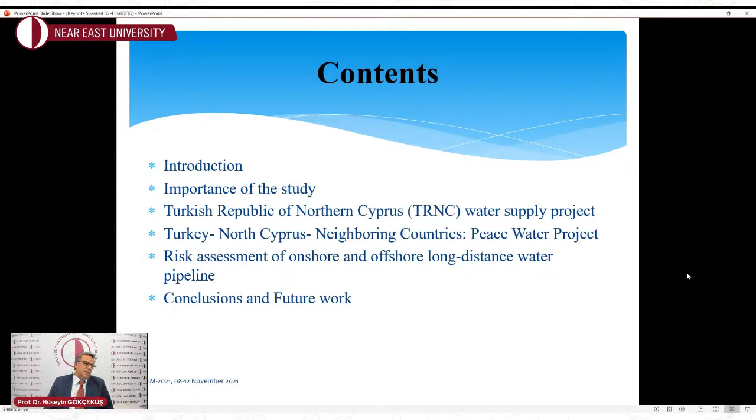My presentation includes introduction, importance of the study, Turkish Republic of Northern Cyprus water supply project, Turkey-TRNC neighboring countries peace water project, risk assessment of onshore and offshore long-distance water pipeline, and at the end of my presentation you will see conclusions and future work.

Rapid population growth has increased energy demand, economic activities, and water crisis over the last few decades, which leads to reduced resources on land and increased environmental issues. Therefore, certain human activities have moved from land to sea to explore marine resources to support economic development and solve the global water crisis. For example, the Turkish Republic of Northern Cyprus water supply project, nearshore wind farm installations, and so on.

Maritime engineering is necessary for the success of offshore development projects. However, because of the highly uncertain ocean working environment, the probability of maritime engineering project failure is high. Using risk assessment to improve maritime engineering technology is a reasonable approach to managing this problem.

Risk is generally understood as the possibility of human casualties or property damage caused by an event. Therefore, the risk of an event includes the number of casualties or extent of damage and the frequency of occurrence. According to the risk management guidelines of the International Organization for Standardization, risk assessment integrates three processes: risk identification, risk analysis, and risk evaluation.

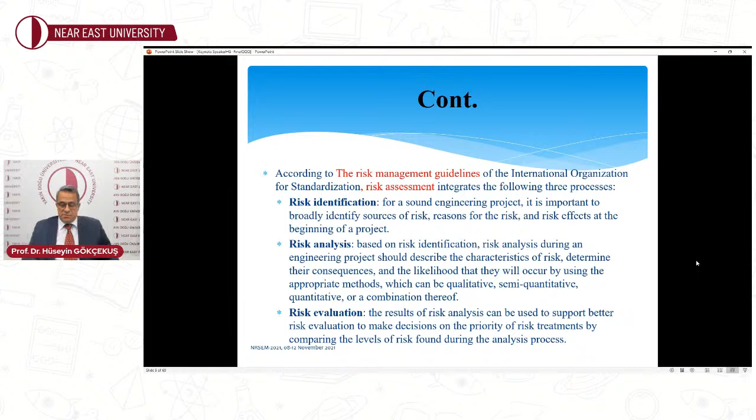Importance of this study: engineering project managers have recently adopted risk control techniques to improve project success rates. A successful engineering project depends on strong engineering technology and on knowing how to deal with the risk caused by uncertain factors throughout a project.

Risk management can provide assistance to engineering projects in three areas: identifying factors that influence project success, focusing on the most hazardous factors based on risk priority levels, and balancing the cost and benefits of risk treatments.

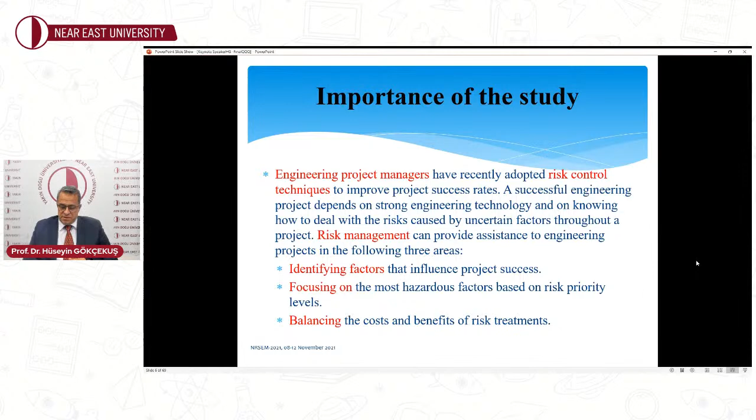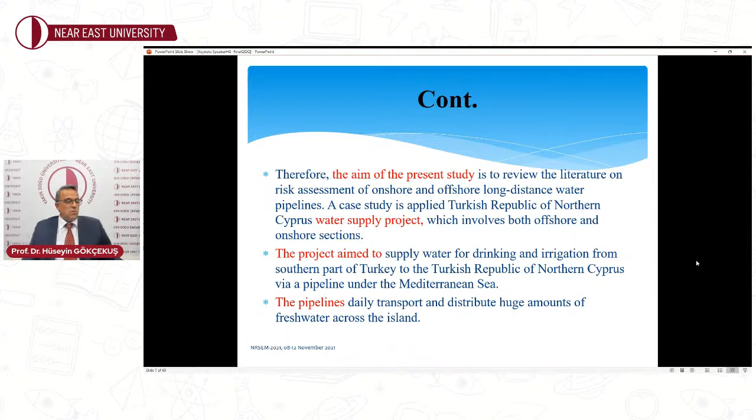Therefore, the aim of the present study is to review the literature on risk assessment of onshore and offshore long-distance water pipelines. A case study is applied: the Turkish Republic of Northern Cyprus water supply project, which involves both offshore and onshore sections. The project aimed to supply water for drinking and irrigation from the southern part of Turkey to the Turkish Republic of Northern Cyprus via a pipeline under the Mediterranean Sea. The pipeline daily transports and distributes a huge amount of fresh water across the island.

Turkish Republic of Northern Cyprus water supply project. Let's talk about this project. It's known, but let's make it more clear.

TRNC experiences problems such as freshwater shortages, irregular rain distribution, and rain pouring down directly into the Mediterranean Sea without infiltration. Due to climate change and high temperatures, evaporation is increasing in water storage structures. Because of the water shortage problem, groundwater is overexploited, causing the water table to decline below sea level by many meters. This has made the island's water salty, and so the water quality of TRNC decreases year by year. Generally, most of the island's water needs rely on groundwater.

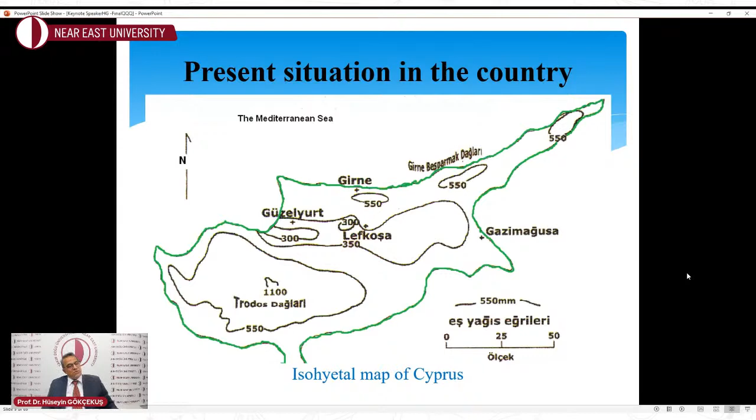This figure presents the isohyetal map of Cyprus, showing the present situation in the country. This is the whole island - Turkish Cypriots living in the north and Greek Cypriots living in the south. If you check this figure, you can see the lowest rainfall values between Girne Beşparmak Dağları mountains and Troodos mountains, in the Mesaoria plain. Around the Güzelyurt region, it's less than 300 millimeters per year.

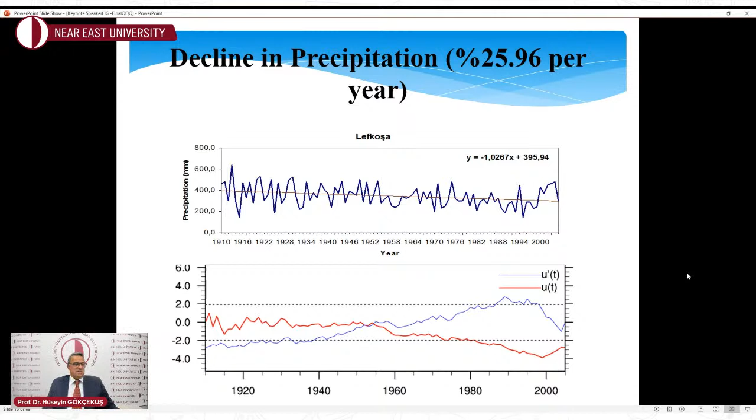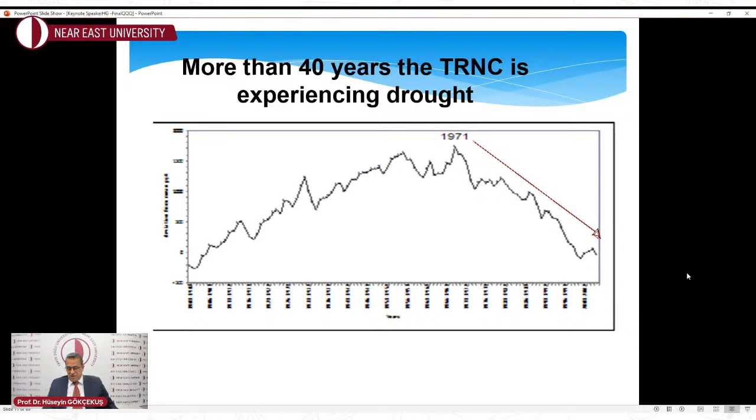This graph is also calculated and drawn by us. The decline in precipitation is very clear - over approximately 100 years, the precipitation value decreased by 25.96%. It's very important. This figure shows that for more than 40, 50 years, the TRNC has been experiencing drought. Since the 1970s, the yearly rainfall has continuously decreased.

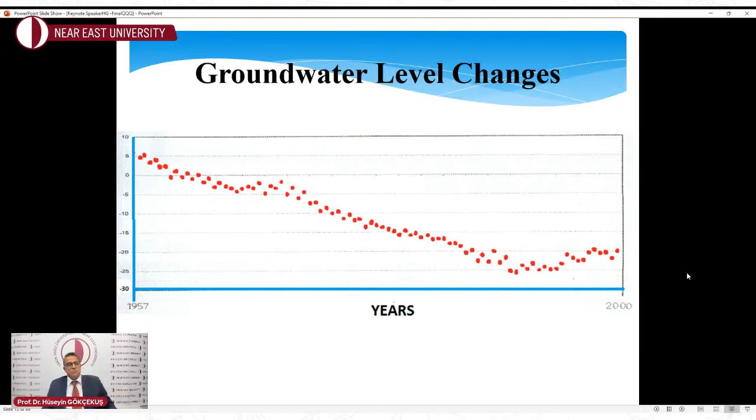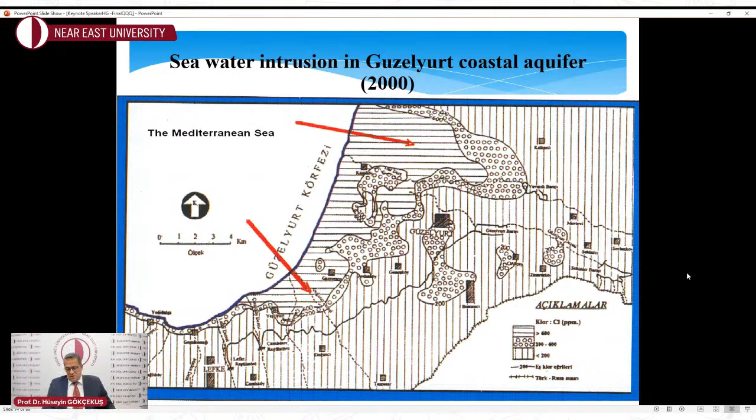It depends on over-exploitation, over-pumping from the aquifer - the coastal aquifer, the Güzelyurt aquifer, the Morphou aquifer - and seawater intrusion happened. Five up to eight kilometers of seawater intruded inland, and we obtained saline water from our aquifer. For this reason, the quality of the water has continuously decreased and water resources are progressively drying out.

It was noted that the optimal solution for resolving the water problems long term in northern Cyprus was to transport water to it. In this context, the Turkish Republic of Northern Cyprus Water Supply Project targeted to supply the island with drinking water. This project is comprised of three main parts: the first is the Turkey part, land structures; the second, the sea crossing; and the third part, the North Cyprus land structure. I will show it by figure later on.

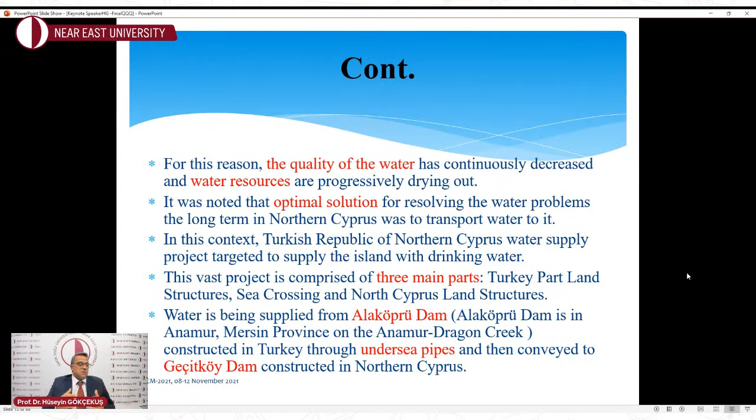Water is being supplied from Alaköprü Dam, constructed in Turkey, through undersea pipes, and then conveyed to Geçitköy Dam, constructed in northern Cyprus. With these three main parts, the water supply project is aimed at delivering water for drinking and irrigation from southern Turkey to the northern coast of Cyprus via a pipeline under the Mediterranean Sea.

The pipeline provides 75 million cubic meters of water per year to TRNC. With this project, approximately half is for potable water and the other half for irrigation at the beginning. In time, the irrigation part will decrease, depending on the increasing population, as people will use more water from this transported water. Approximately 2.38 cubic meters of water per second is planned to flow through the pipeline. An area of 4,824 hectares will be irrigated.

The Alaköprü Dam on the Turkish side, situated at a height of 99 meters, stores the water required for the pipeline, with approximately 130 million cubic meter capacity. From Alaköprü Dam, the water is transported via a 22-kilometer ductile pipeline, 1.5 meters in diameter, to the Anamuryum balancing tank, with 1,000 cubic meter capacity, and then after 1 kilometer enters the pipeline leading into the Mediterranean.

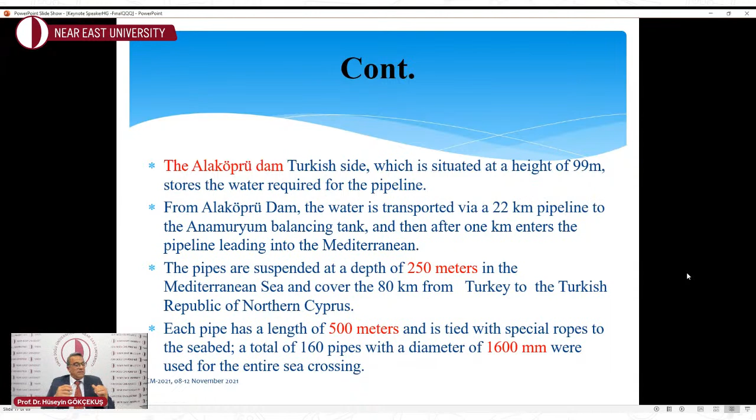The most critical point of the water supply project is the sea crossing. The specific factor that demonstrates the importance of this project is that such a long distance transition using a suspended pipeline is the first around the world. The sea crossing is implemented using special high-density polyethylene pipes.

The steel yokes, which act as fixing and anchoring points, have an outside diameter of 1,514 millimeters, with a bend angle of 30 degrees without any connecting elements. These steel yokes were drawn down to a depth of 250 meters by ropes and then anchored to the seabed, with some concrete blocks fixing them.

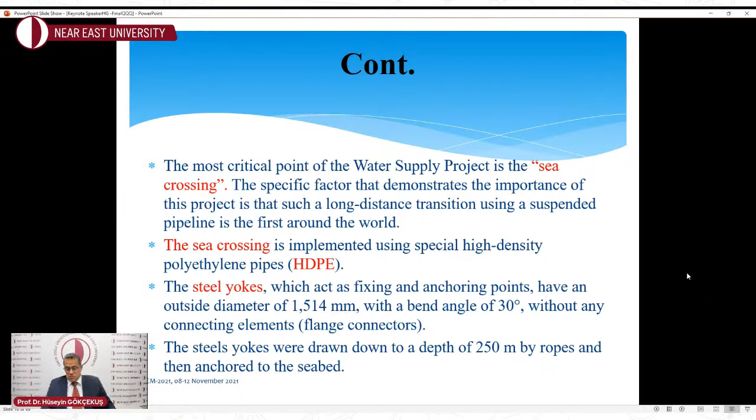Flanged connectors were assembled on a special installation ship, with 24 connection bolts on both ends of the steel yokes.

The deepest part of the seabed is 1,430 meters - imagine, like a valley between Turkey and Cyprus Island. We have to pass this depth. Since the water pressure is too great on the seabed, it's not possible for the pipes to lay at that depth. The pipeline also has to be sufficiently deep that it does not interfere with passing ships or submarines. Other advantages are that the pipes can be laid in as straight a line as possible, avoiding the steep contours of the seafloor.

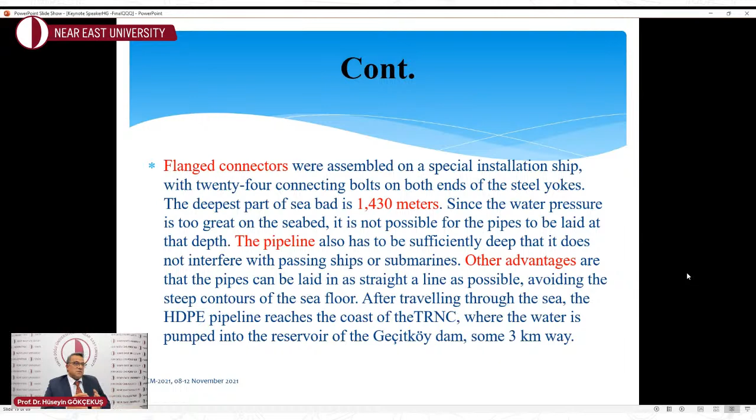After traveling through the sea, the high-density polyethylene pipeline reaches the coast of the TRNC, where the water is pumped into the reservoir of the Geçitköy Dam, some 3 kilometers away. This capacity is 26.5 million cubic meters.

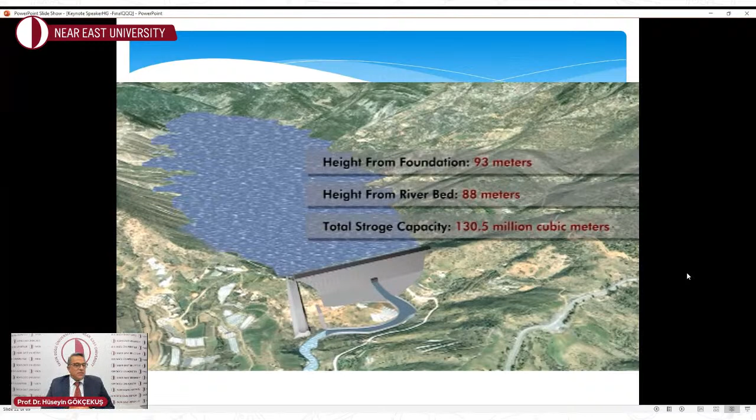Alaköprü Dam, the Turkish side dam. The capacity is 130.5 million cubic meters, and the other details you can see. We are also obtaining electricity, 26 megawatts from this reservoir, the Alaköprü reservoir,

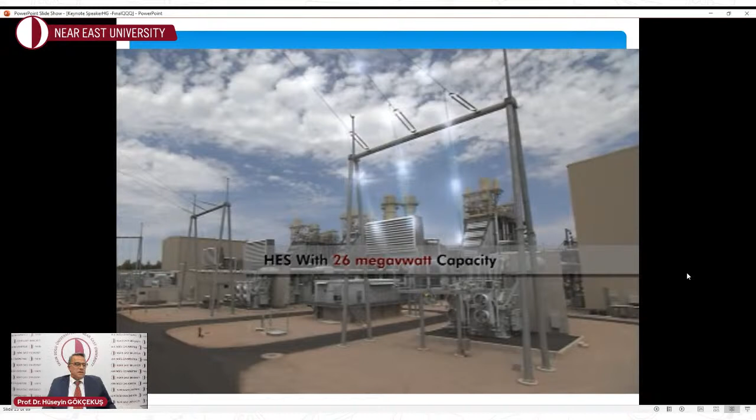interconnected lines give this electricity. This is the line in between Alaköprü, 22 kilometers ductile pipeline, 1.5 meters diameter, up to Anamuryum balancing tank, with 1,000 cubic meter capacity,

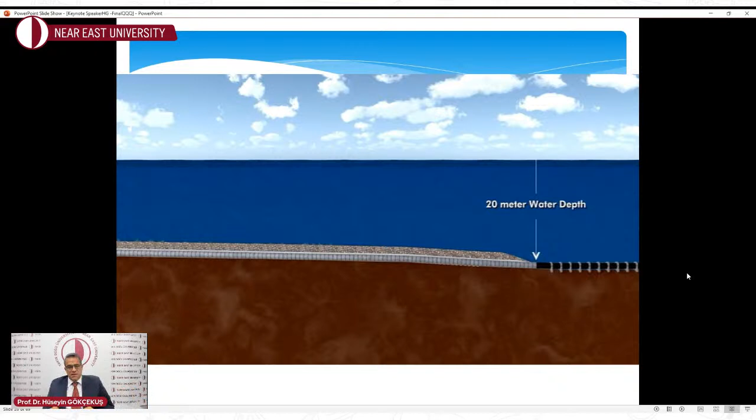and later, from this point, Anamuryum balancing tank to the sea is 1 kilometer, total 23 kilometers pipeline. This is the first part of the sea cross. As you see, the pipeline is fitted inside the seabed up to minus 20 meters. This is the first part, on both sides, not only the Turkish side but also the TRNC side.

The second, this is the process. You can see how they dig the seabed and put the pipeline inside. This is the second part of the sea cross.

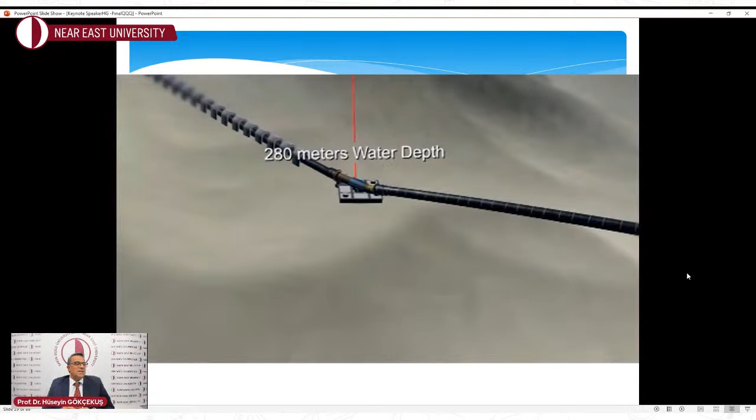As you see, together with concrete blocks, they fix the pipeline to the surface of the seabed until 280 meters. After 280 meters, the most important part, the suspended pipelines, started.

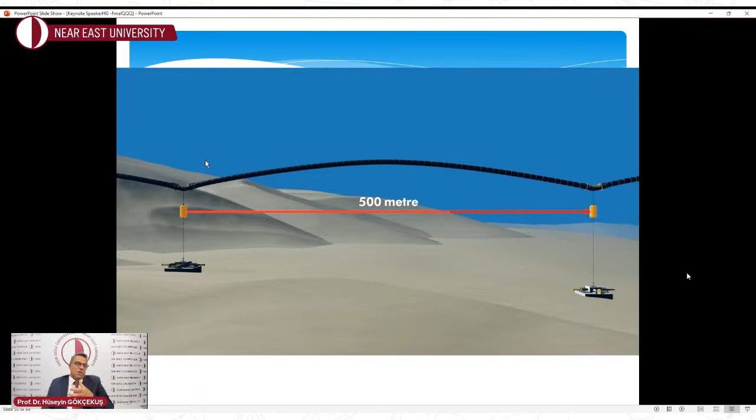They produce it on the shoreline in a special factory. They constructed a factory first on the shoreline because a 500 meters long pipeline cannot be transported from one point to another. They produce it on the shoreline, and when they have enough quantity, they start the process.

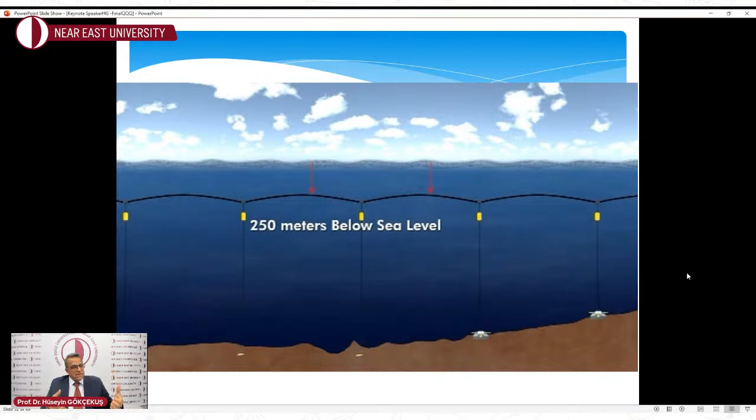You can see minus 250 meters below sea level. This is the placement of the pipeline. How can we suspend it? By using special ropes and other instruments.

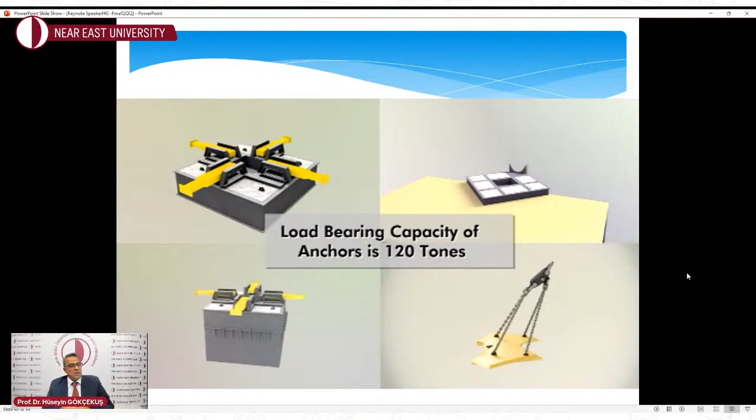This is another figure. You can see easily how they fix it. And they use some other concrete blocks to fix it at the bottom.

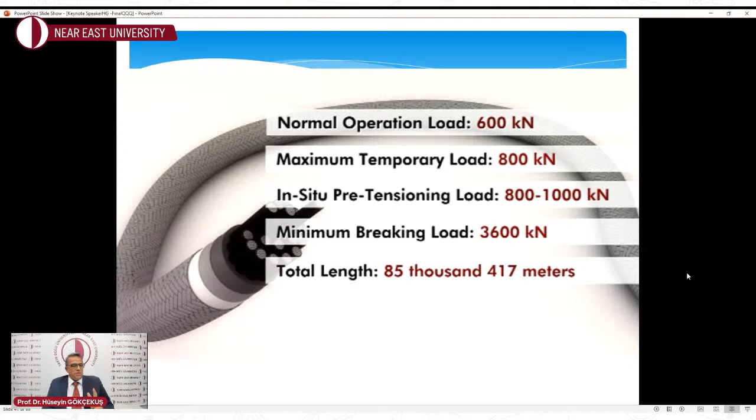This is the rope. The properties are really very interesting, a very strong rope, produced in Norwegian countries, and there are 4 kinds of ships.

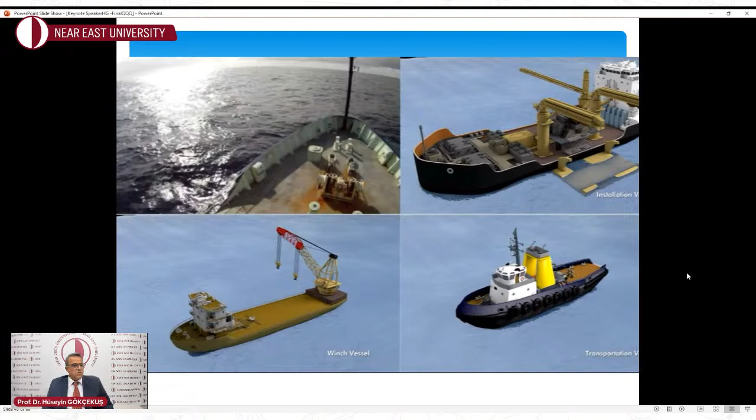On the right hand, you can see a huge 2,000 square meter area - it's a very huge ship. And we came to the Cyprus part.

This pipeline reaches up to the Güzelyalı pumping station, Güzelyalı pumping station, without energy. No need to use energy.

Normally, naturally, water from the Alaköprü Dam, 130 million cubic meter capacity, flows through the Güzelyalı pumping station without energy. But at this point, we need energy.

As you see, this is the Güzelyalı pumping station up to the Geçitköy Dam, 26.5 million cubic meters. If you compare with the Turkish side reservoir and the TRNC side, it's a little bit different - 130 and 26.5, you can compare.

After Geçitköy Dam, we pump the water from the Geçitköy pumping station to the treatment plant. After this point, after the treatment process, this water is distributed from north to south, from east to west, through more than 100 kilometers of pipeline, to all the municipalities. It's completed.

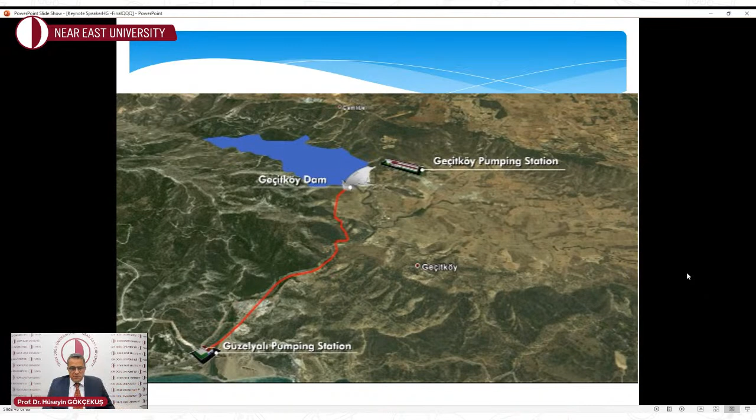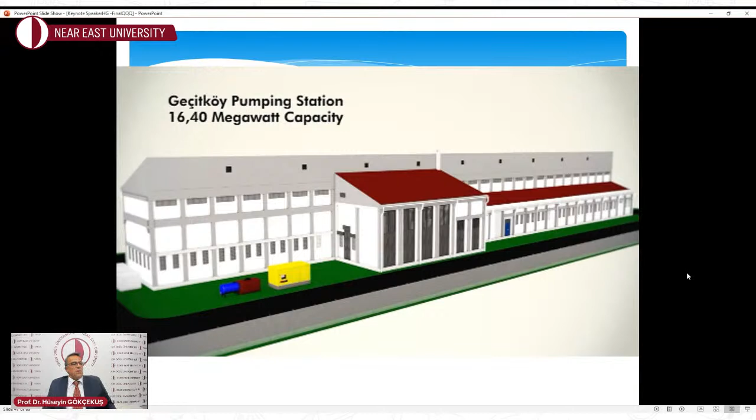This is the first pumping station, Güzelyalı pumping station, needing 5 megawatts of electricity. The other one, Geçitköy pumping station, has a 16.4 megawatt capacity which we are using now. This is the property of our Geçitköy Dam, 26.5 million cubic meters, and the other properties you can see easily.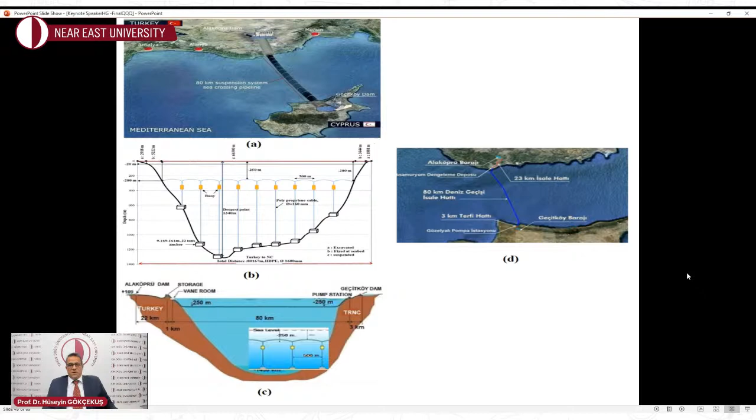Turkey TRNC neighboring countries, Peace Water project. Why are we saying this? Access to good quality water in sufficient quantity and quality is fundamental for most economic activities and for the daily lives of every human being all over the world. However, as you know, only 3% of water is fresh water, and it is not distributed equally around the world. It's not equally distributed. Some people are lucky, the others not.

Additionally, the increasing population and growing industry are negatively affecting sustainable water and food security. This is very important. If you don't have enough water, you have the water problem and also a food problem. You cannot talk about food security without water. For example, some countries such as Cyprus, Egypt, Lebanon, Palestine, and Israel are experiencing freshwater shortages. I will make it more clear by using a figure later on.

The Turkey TRNC water supply project is a unique and complex project, and the Turkish government has promoted the project as the project of the century. Additionally, Turkey has also defined it as peace water. I am saying also, this may be a peace water to establish between South and North Cyprus.

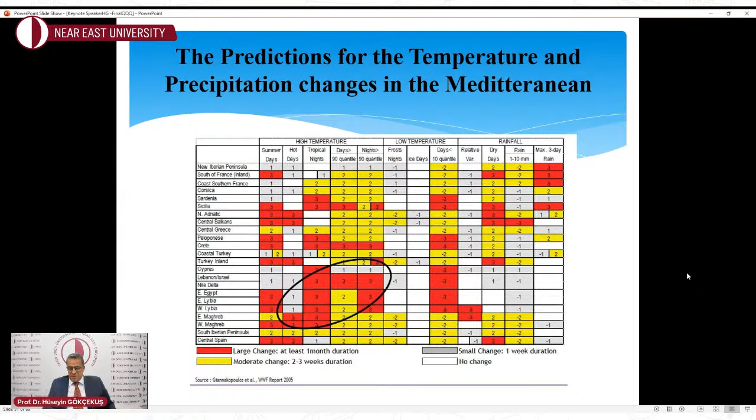The project is expected to solve the TRNC's fundamental and chronic problems of water shortages and expensive electricity. The project will make a significant contribution to the economic development of the region. It will enhance agriculture and contribute to enhancing the standard of living in TRNC and the region, while also ensuring that all residents and visitors to TRNC can drink pure water. Thus, the project will meet all of the TRNC's water needs for the next 50 years. For at least 50 years, we will not suffer from water shortage problems related to drinking and municipal purposes.

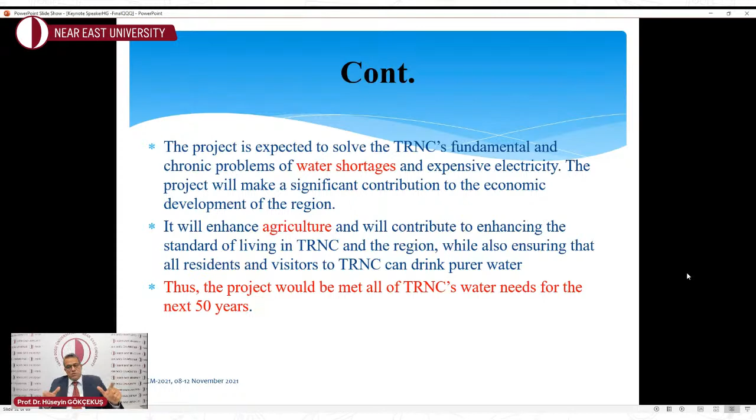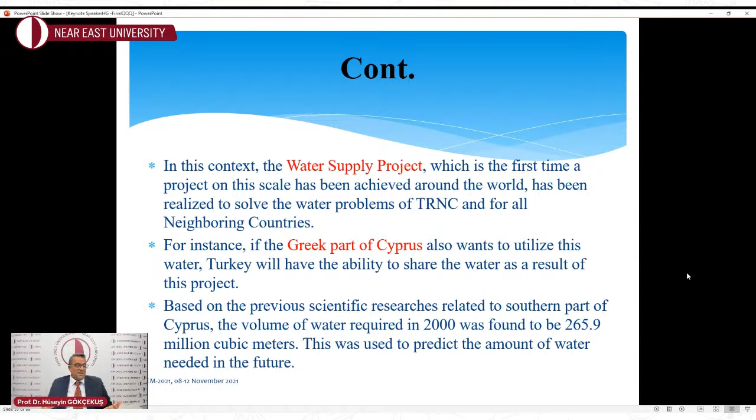In this context, the water supply project, the first time a project on this scale has been achieved around the world, has been realized to solve the water problems of TRNC and all neighboring countries. For instance, if the Greek part of Cyprus also wants to utilize this water, Turkey will have the ability to share the water as a result of this project. Based on previous scientific research on the southern part of Cyprus, the volume of water required in 2000 was found to be 265.9 million cubic meters. This was used to predict the amount of water needed in the future.

In addition, pond capacities were compared, and it was found that the pond capacity in South Cyprus, approximately 330 million cubic meters, is 10 times more than the pond capacity in the northern part of Cyprus, 33 million cubic meters. Furthermore, considering the current and future dry years, as well as the years in which surface water could be used at minimum levels, solutions are required to increase alternative water resources. Therefore, the author believed that a solution to the current water problems in the south part of Cyprus is to use the water that Turkey will share via the Turkey TRNC water project, or to construct new pipelines parallel to the first one.

Moreover, it is evident that Turkey is not a country that has extensive water resources. However, there are billions of cubic meters of water flowing from Turkey's southern regions into the sea, also during the summer. In fact, the capacity of Dragon Stream, which is providing only 75 million cubic meters of water per year, is in fact 750 million cubic meters. Turkey has the option to increase the number of pipelines to increase the capacity tenfold. Consequently, the water project is not only the culmination of a longer-term plan to develop the north and to prepare it for a solution, but will also prepare it to function independently.

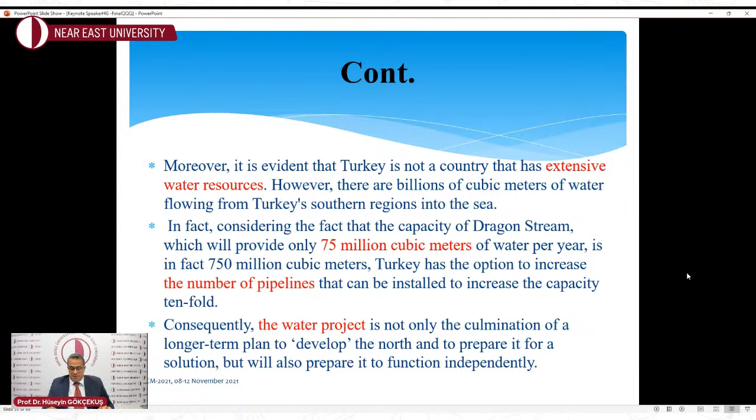This represents the plan B, making TRNC into a stronger entity so that in the event that negotiations fail yet again, the Turkish side can argue that it should be recognized.

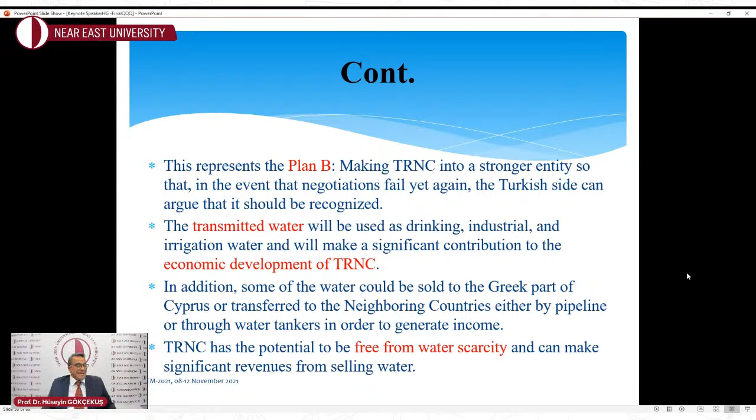The transmitted water will be used as drinking, industrial, and irrigation water, and will make a significant contribution to the economic development of TRNC. In addition, some of the water could be sold to the Greek part of Cyprus or transferred to the neighboring countries, either by pipeline or through water tankers, in order to generate income. TRNC has the potential to be free from water scarcity and can make significant revenues from selling water.

Now let's come to the main part of our presentation. After the explanation of all the properties of this project, risk assessment of onshore and offshore long-distance water pipeline. In TRNC, the quantity of long-distance water transmission projects has been increasing and their scope has become larger and larger due to the water crisis in the country. Therefore, the TRNC water supply project is a major project between Turkey and TRNC that includes onshore and offshore sections.

Therefore, safety of workplace, environment, and employers is also another important argument. In this respect, it is essential to discuss an occupational risk assessment study to eliminate the risks that may arise around the pipeline.

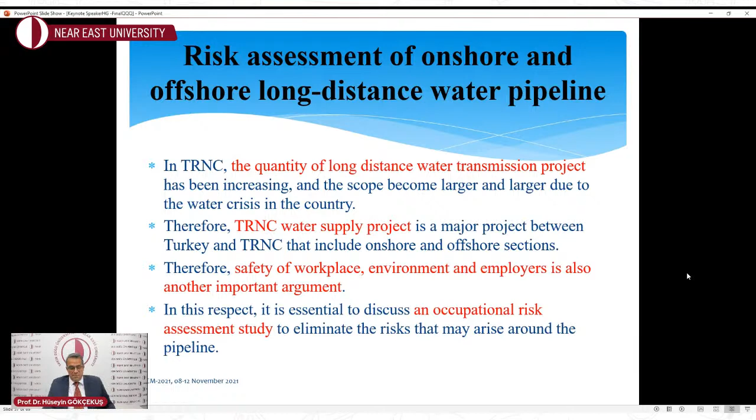In such large projects, various risks have emerged due to improperly trained construction personnel, wide range of operations, and risk management awareness. Moreover, traffic conditions, restrictions, severe construction conditions, the impact of changing weather and other external factors can cause different hazards and safety risks for such projects. Hence, effective risk management in such projects is an important process to reduce construction and environmental risks, secure the safety of pipeline construction and employees, and improve the service quality.

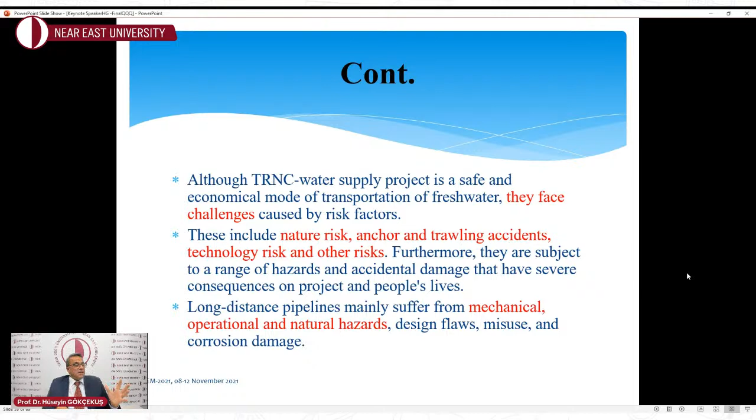Although the TRNC water supply project is a safe and economical mode of transportation of fresh water, it faces challenges caused by risk factors. These include nature risk, anchor and trawling accidents, technology risk, and other risks. Furthermore, they are subject to a range of hazards and accidental damage that have severe consequences on a project and people's lives. Long-distance pipelines mainly suffer from mechanical, operational, and natural hazards, design flaws, misuse, and corrosion damage.

It should be noted, the Turkish government implemented an under-Mediterranean Sea water supply project, which was achieved for the first time in the world to solve the problem of water shortage in TRNC. Additionally, no study deals with modeling the uncertainty involved in the problem of onshore and offshore water pipeline risk assessment.

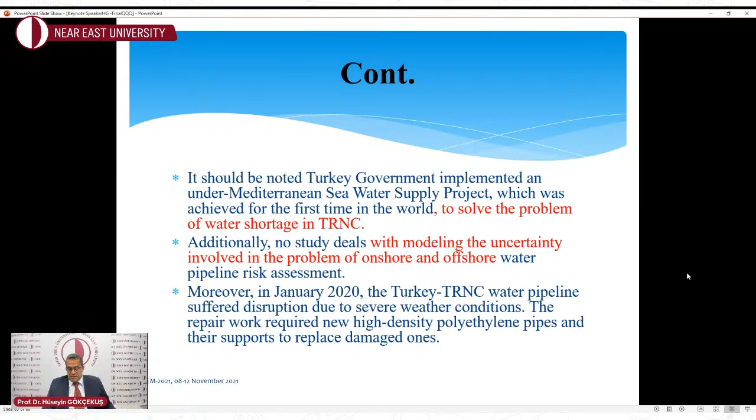Moreover, in January 2020, the Turkey TRNC water pipeline suffered disruption due to severe weather conditions. The repair work required new high-density polyethylene pipes and their supports to replace damaged ones. Due to severe weather conditions and the production of the pipes, the repair work was completed by September 2020.

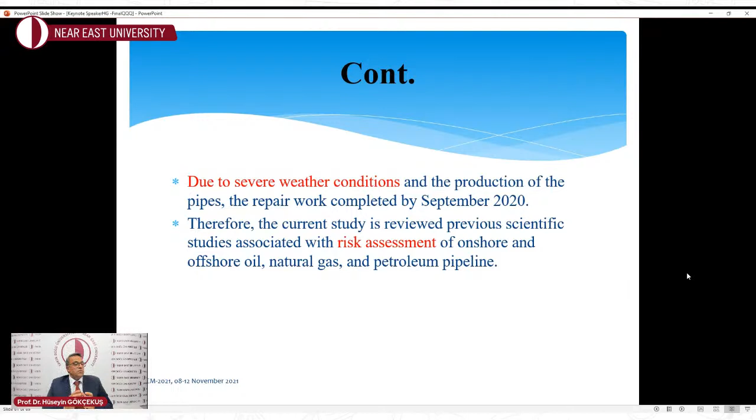Therefore, the current study reviewed previous scientific studies associated with risk assessment of onshore and offshore oil, natural gas, and petroleum pipelines. Consequently, the risk factors are summarized based on the previous studies related to onshore and offshore pipelines. This shows us the type of risk. We will start with the nature risk. It's a sequence, number of risk, and description.

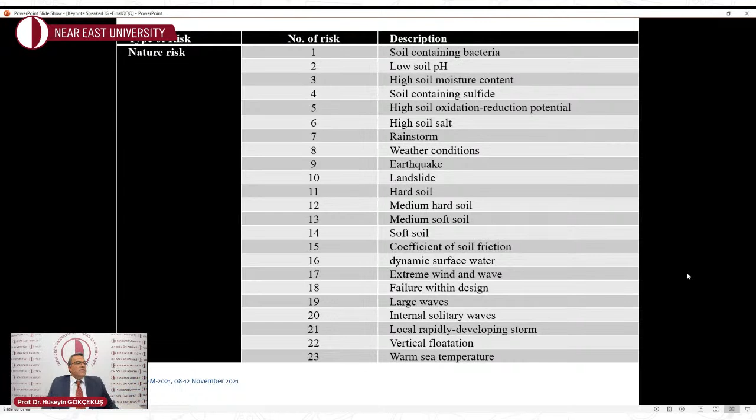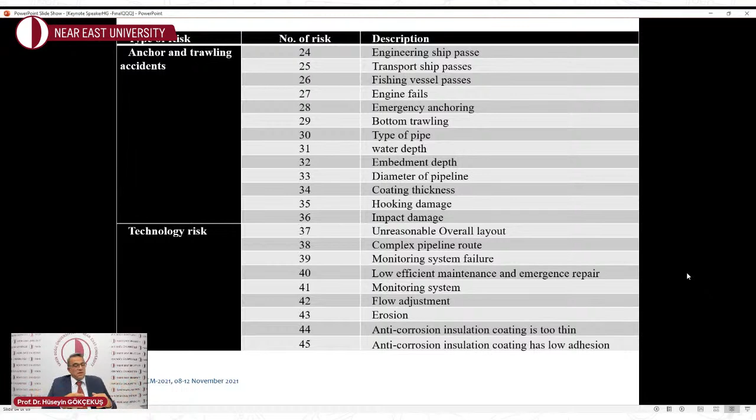For example, low soil pH, high soil salt, rainstorm, earthquake, landslide, hard soil, medium hard soil, something like that. These are classified as nature risk. And the other group, anchor and trawling accidents: engineering ship passe, transport ship passes, fishing vessel, engine fails and something like that. And the other one, technology risk: complex pipeline route, monitoring system failure, flow adjustment, erosion, monitoring system, and finally, technology risk.

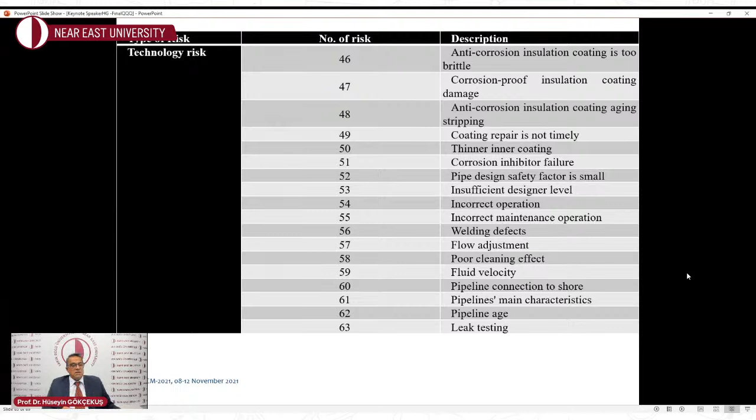As conclusion and future work, let me say some words and finish my presentation. Nowadays, pipelines have been extensively used for transporting water for long distances. Also, constructing a long-distance freshwater transport network would help to reduce the water shortage in the neighboring countries. Therefore, their risk assessment could help to identify the associated hazards and take necessary actions to eliminate or reduce the risk.

As future work, in the present study, the failure modes and effects analysis method, an artificial neural network, and a fuzzy inference system will be used to study the effect of the condition of the onshore and offshore water pipeline on the environment. Moreover, this work can help to identify the associated hazards and take necessary actions to eliminate or reduce the risk in the future.

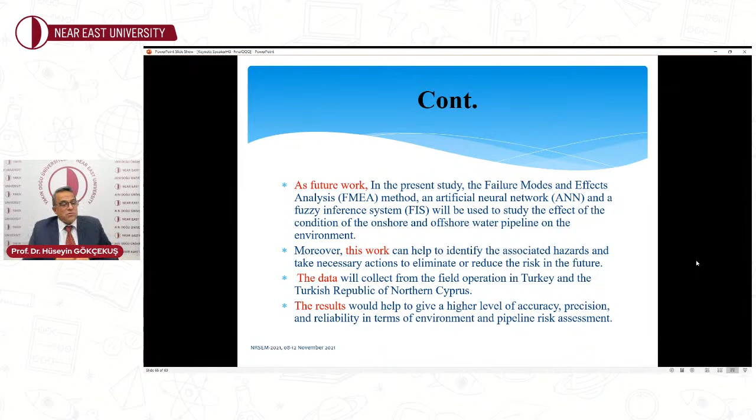The data will be collected from the field operation in Turkey and the Turkish Republic of Northern Cyprus. The results would help to give a higher level of accuracy, precision, and reliability in terms of environment and pipeline risk assessment. Thank you very much for your attention.

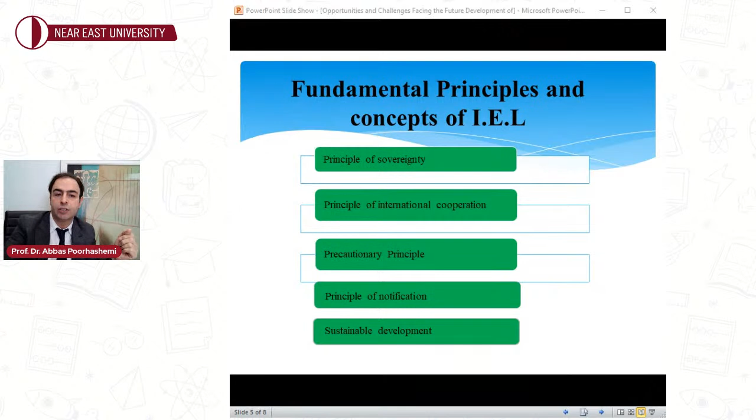Regarding the challenges facing the future development of international environmental law, despite all global efforts to develop binding and non-binding global instruments, environmental concerns and threats such as global warming, climate change, desertification, and deforestation are not only remaining, but also increasing. Today's world's environmental concerns and threats go beyond the prediction of the experts and scientists present at the Stockholm First Environmental Conference in 1972. The first challenge is sovereignty, state sovereignty.

Regardless of the concept of sovereignty of states in international law, one of the main obstacles for the development of international environmental law is the non-acceptance of governments to delegate or limit their sovereignty in favor of international organizations. The principle of sovereignty is one of the basic principles of public international law. However, the concept of sovereignty is not absolute, and it is subject to the general duty not to cause environmental damage.

Another conflict also exists between developed and developing countries in enforcing regulations and implementation of environmental law, as you can see in COP26 in Glasgow. For instance, according to the principle of common but differentiated responsibility, developed countries should take additional actions such as transferring technologies and contributing finance to developing countries. But this principle is not respected properly. This principle is clearly set out in many international environmental treaties such as the UNFCCC or CBD, and mandates developed countries to provide financial resources to assist developing countries in implementing the objectives to protect the climate or biodiversity.

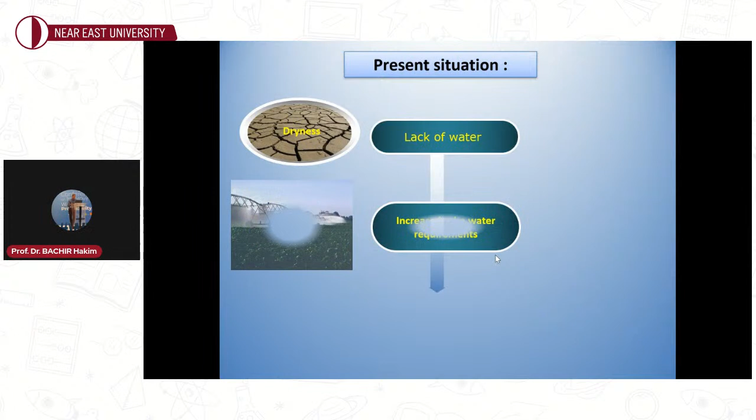Dryness due to the lack of water, the increase in water requirements and the conflict of use with other sectors lead to policy action at both the microeconomic and macroeconomic scales, and augment significant risk in establishing strategies without considering the water resources factor and other factors such as climatic, physical and regional parameters.

The economic challenges related to agriculture and industry lead us to better know our regional and local climate by adopting the best suited method to represent climatic parameters on the spatial and temporal plan, especially in areas characterized by heterogeneous rainfall distribution in addition to drought periods.

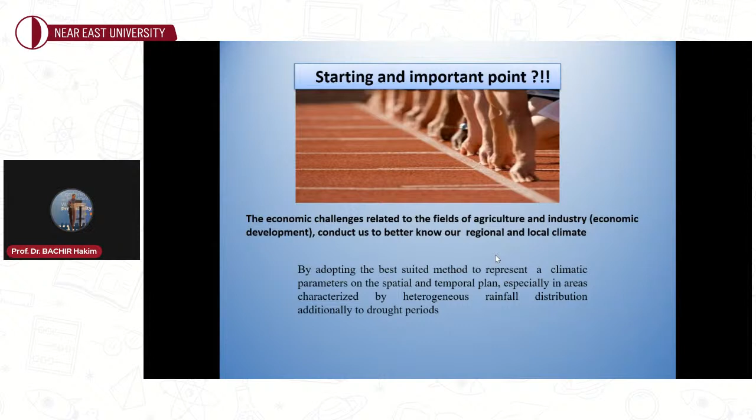Our region extends over 23,610 square kilometers with a perimeter of 1,872 kilometers, situated between 35 to 36.6 degrees latitude north and 4.2 to 8.3 degrees longitude east. The region is characterized as a semi-arid region.

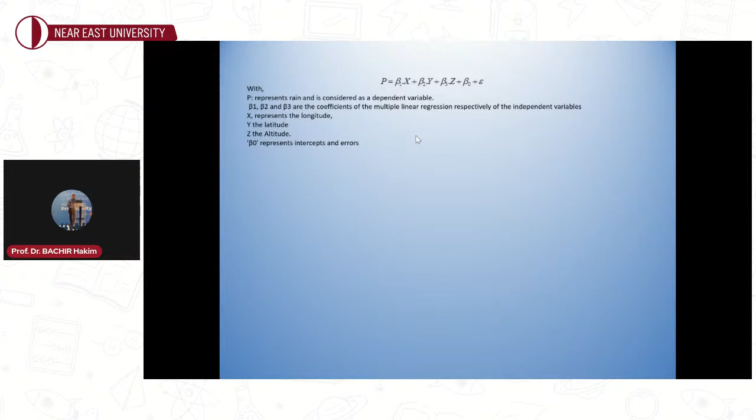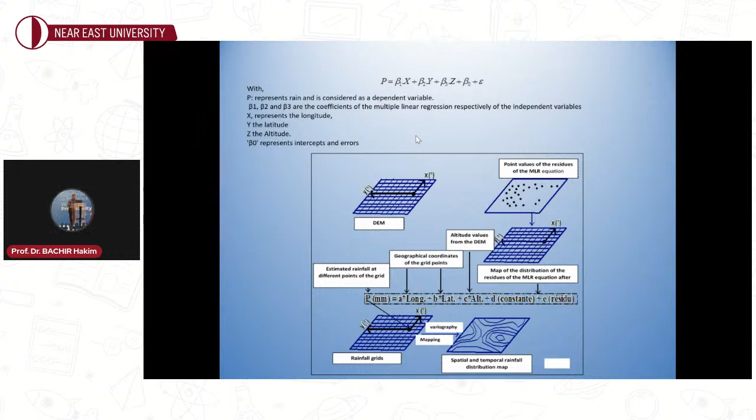However, this step required a reflection on the methodology and tools used to determine the parameters of the equation in this figure. To do this, we found it useful to make some basic information materials, such as a digital elevation model and a fictitious point grid. This figure represents the digital elevation model, and the next represents fictitious rain gauging stations, 255 points separated by a distance of 15 kilometers.

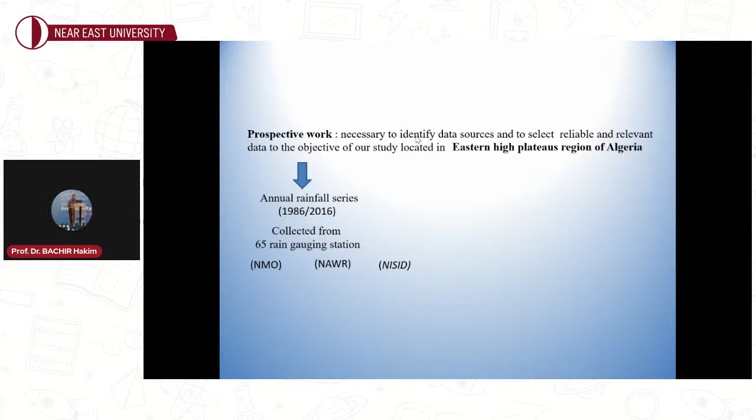Prospective work is necessary to identify data sources and to select reliable data relevant to the objective of our study, located in the eastern high plateau of Algeria. We selected annual rainfall series from 1986 to 2016, collected from 65 rain gauging stations. On the other hand, different maps were collected, provided by the National Institute of Map and Remote Sensing affiliated to the National Army of Algeria.

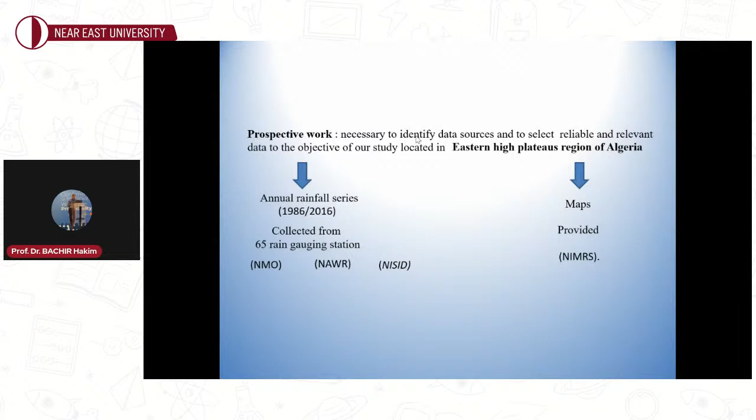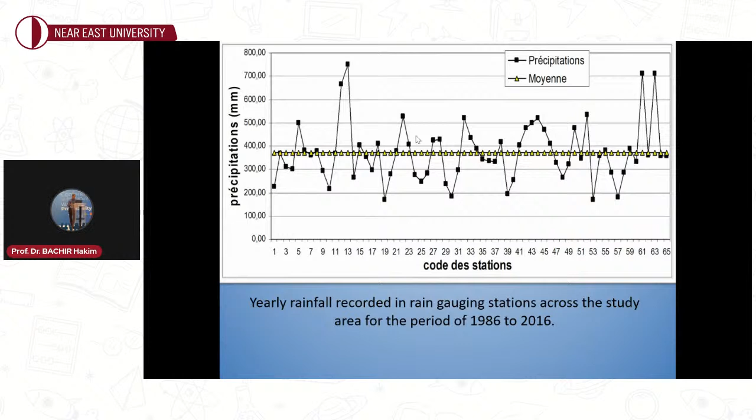This figure represents yearly rainfall recorded in different rain gauging stations across the studied area. You can see that 36 rain gauging stations are less than 362.5 millimeters. This value represents the average value of all rain gauging stations.

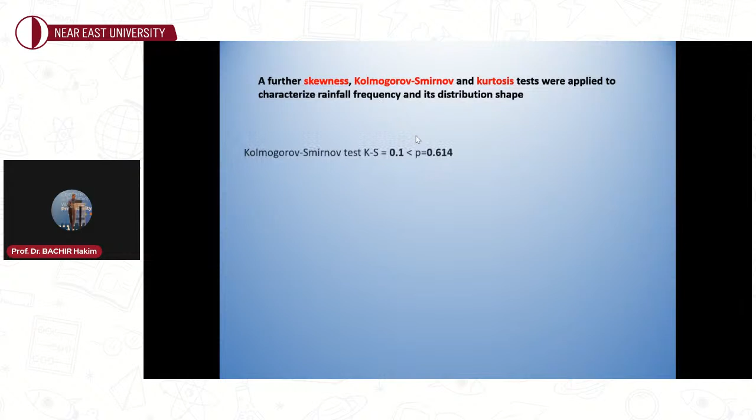Further skewness, Kolmogorov-Smirnov and Kurtosis tests were applied to characterize rainfall frequency and its distribution shape. We can see that the Kolmogorov-Smirnov test indicates that the distribution shape is not rejected, and it is moderately skewed with a platykurtic shape.

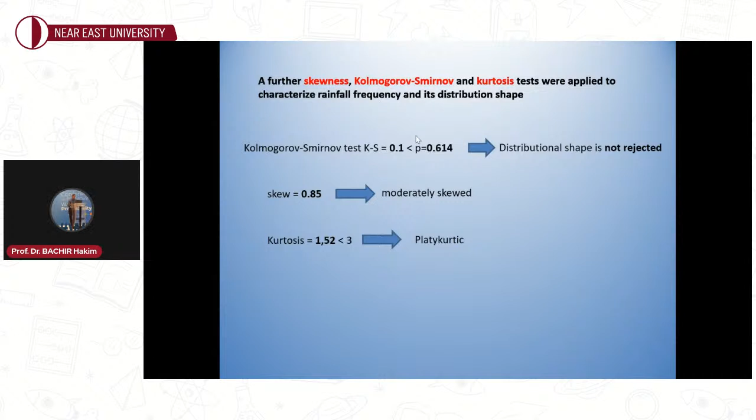One of our important objectives is to determine rainfall gradient structure and mapping spatial temporal distribution of the rainfall.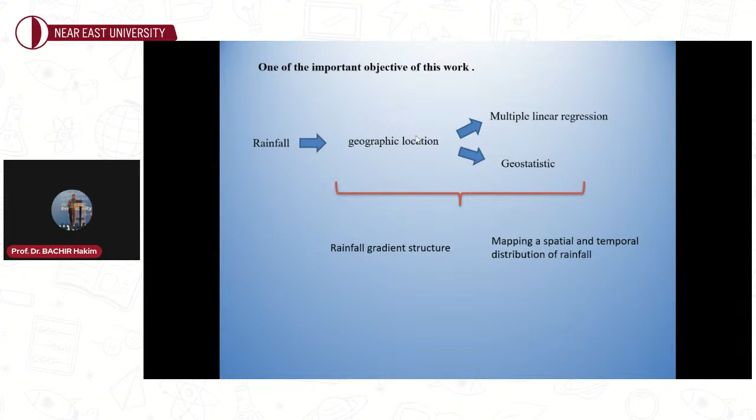About the MLR model, you can see that multiple R equal to 0.703, square R is 0.59, and then adjusted R equal to 0.51.

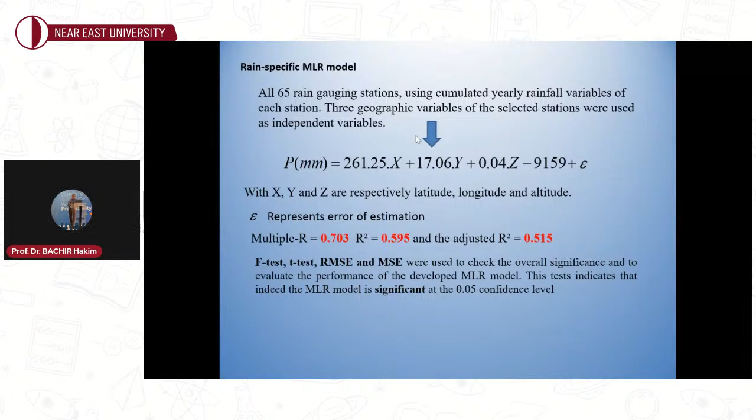Different elements are tested, such as F-test, T-test, RMSE, and MSE, were used to check the overall significance and evaluate performance of the developed MLR model. These tests indicate that the MLR model is significant at the 0.05 confidence level. Different values are summarized in this table.

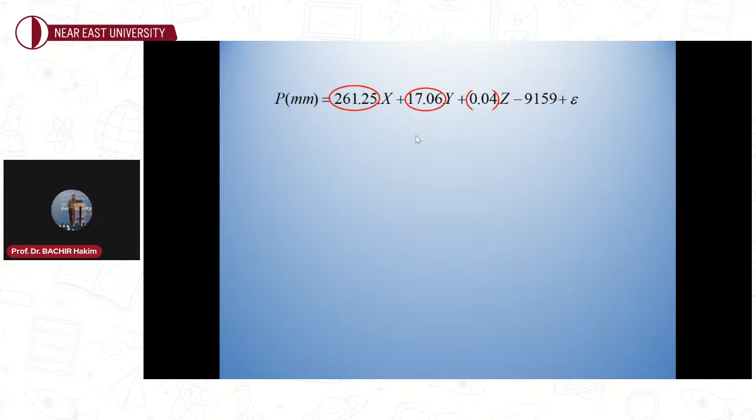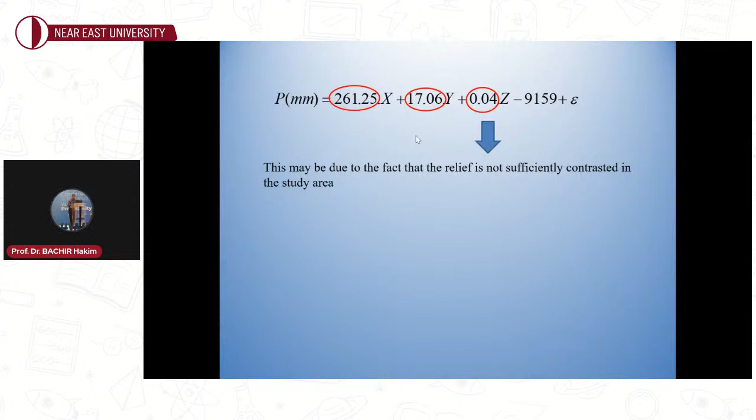In another view, you can see that the altitude parameter is low. This may be due to the fact that the relief is not sufficiently contrasted in the studied area.

Multilinear regression in this case gives a more accurate description of the regional distribution of precipitation or rainfall. It appears that 59.5% of observed variability of rainfall is attributed to geographical parameters, leaving 40.5% residual variance attributed to the unmeasured complication.

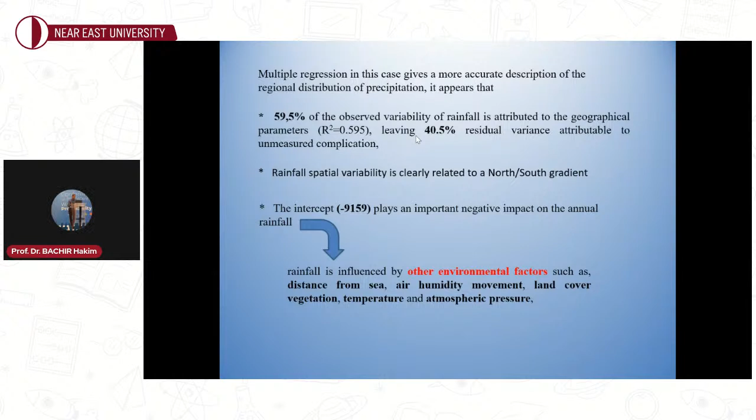Rainfall spatial variability is clearly related to the north-south gradient in this case. The intercept plays an important negative impact on the annual rainfall. Rainfall is influenced in this case by other environmental factors such as distance from sea, air humidity movement, land cover, vegetation, temperature, and atmospheric pressure.

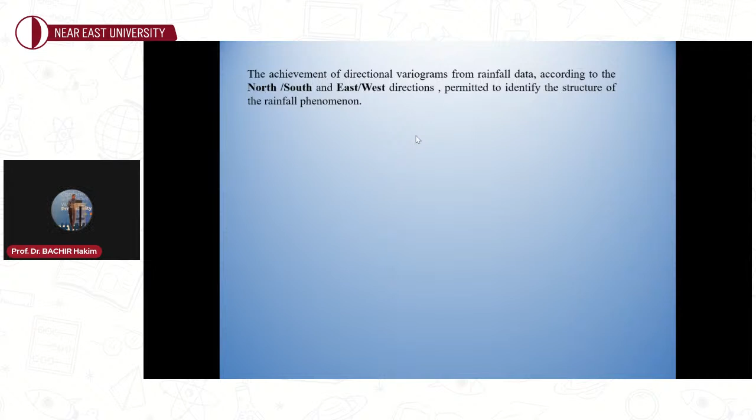When we establish a map of rainfall, we can see this fluctuation and this microclimate in the map of rainfall. As you can see here, the existence of microclimate is indicated by different variables.

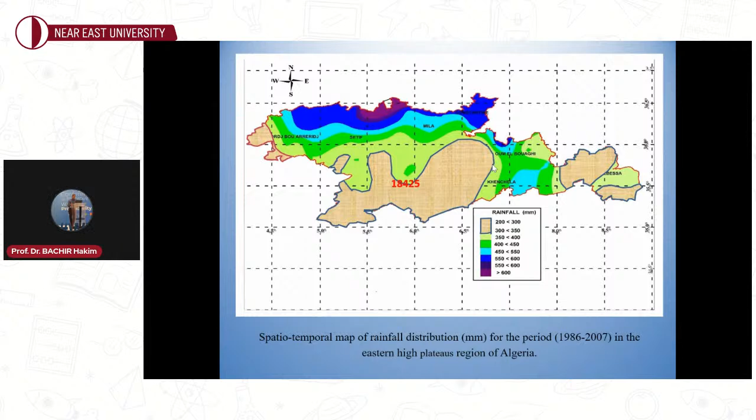The rest of the isohyet covers an area of 4,173 square kilometers.

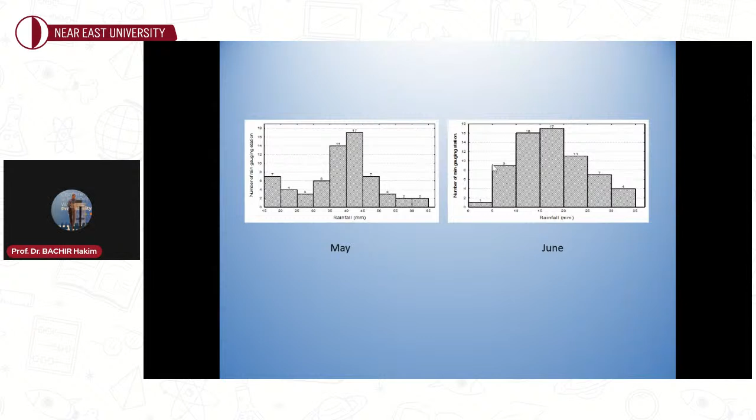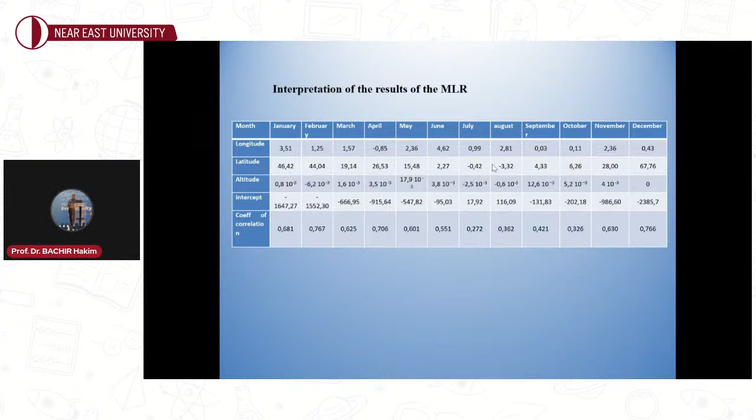Different parameters are summarized in this table, and you can see a representation of different MLR parameters across this table. About the trend of monthly rainfall, we can see that the effect of longitude on precipitation is variable and developed in an irregular way in different months of the year. The shape of the graph follows a zigzag form, indicating that the coefficient value of longitude in the multiple regression equation does not follow a logical sequence.

However, two important stages in the evolution of the longitude effect stand out. The first starts in January, when the longitude effect decreased too sharply to reach a negative value of minus 0.85. The second, starting from this point, reaches 4.62. This can be explained by the fact that precipitation in winter is oceanic in nature, due mainly to the large-scale westerly circulation, generally of low and instantaneous intensity, but following a long duration.

About the effect of latitude, it is not very significant for the months of June to October, although the effect of this factor is significant for the remaining months, in particular for December at 67, January at 46, and February at 44. In the remaining months of the year, the effect is medium.

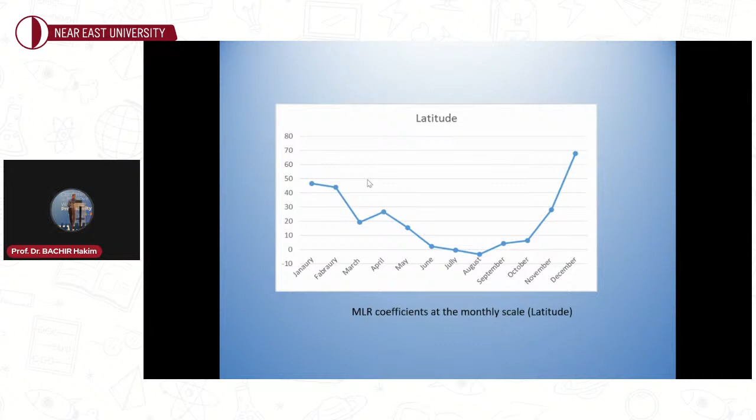It can be said that altitude has no effect on precipitation in the studied area. This is due to the low relief contrast in the studied area, and confirms the result of a study conducted with yearly rainfall data for the same period.

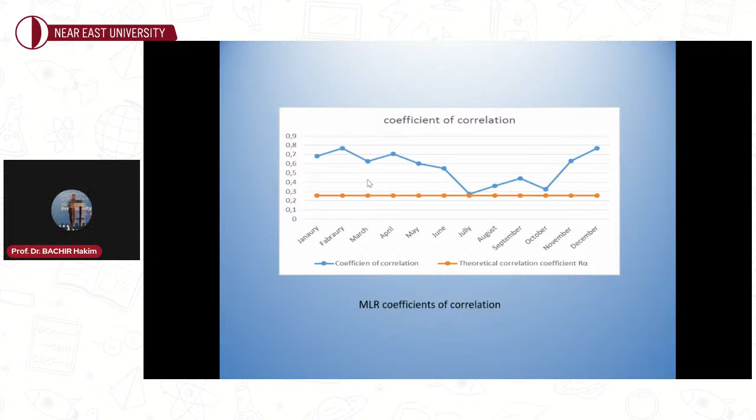We can conclude that the geostatistical analysis indicates the existing drift during the yearly annual rainfall and the monthly annual rainfall, supporting the MLR result concerning the existence of a strong north-south rainfall gradient in the studied area. The complexity of rainfall estimation in the region suggests the requirement to consider other variables, such as temperature and air masses movement and land cover vegetation, to better understand the influence of these parameters on rainfall.

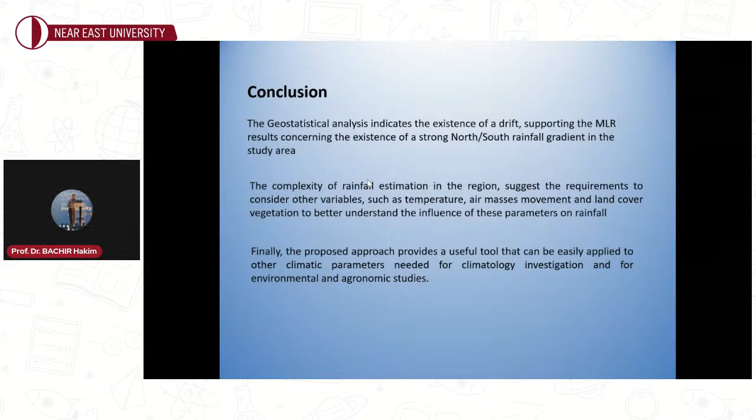Finally, the proposed approach provides a useful tool that can be easily applied to other parameters, or other climatic parameters, needed for climatology investigation and for environmental and agronomic studies. Thank you for your attention.